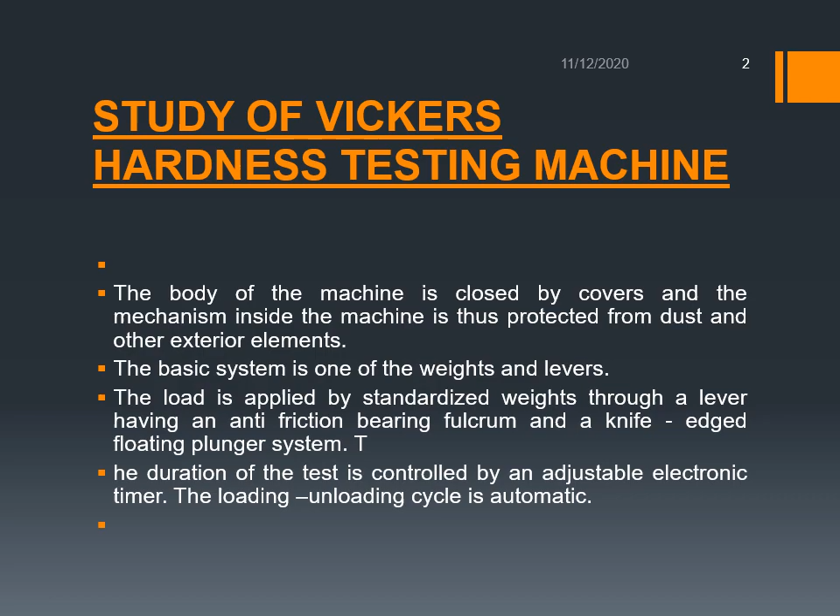And here the indenter used is made of diamond, having a regular pyramid shape with a square base, also known as a square right pyramid.

Now the produced impression is projected to the focusing front screen, while the diagonals of impressions are measured by means of measuring equipment. So here you will be measuring the diagonals of the square shaped indentation. Usually the test loads are 50, 30, 20, 10 or 5 kgf. You can use any of these depending upon the specimen that you are using.

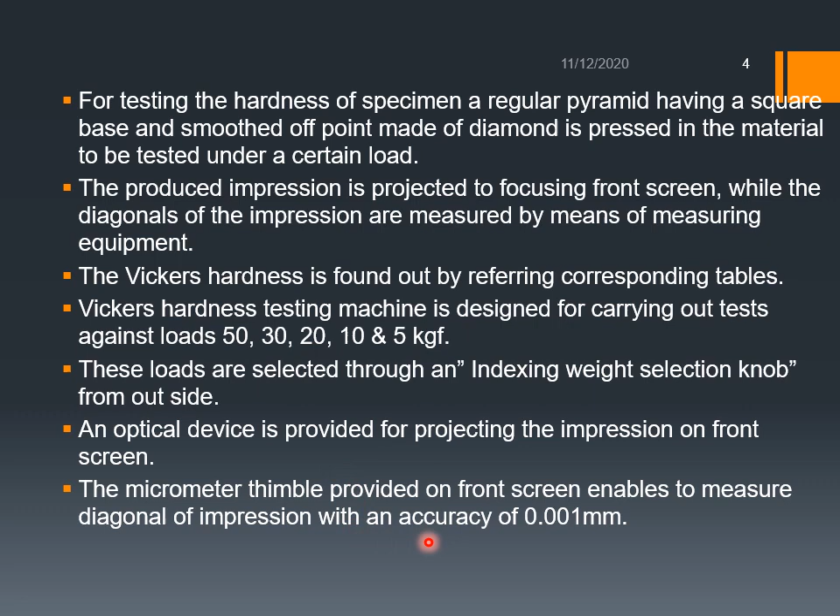The loads are selected through an indexing weight selection knob from the outside, similar to the previous machine used in Brinell or Rockwell test. And here an optical device is provided for projecting the impression in front of the screen, from which you can directly measure the length of the diagonals of the indentation with an accuracy of 0.001 mm.

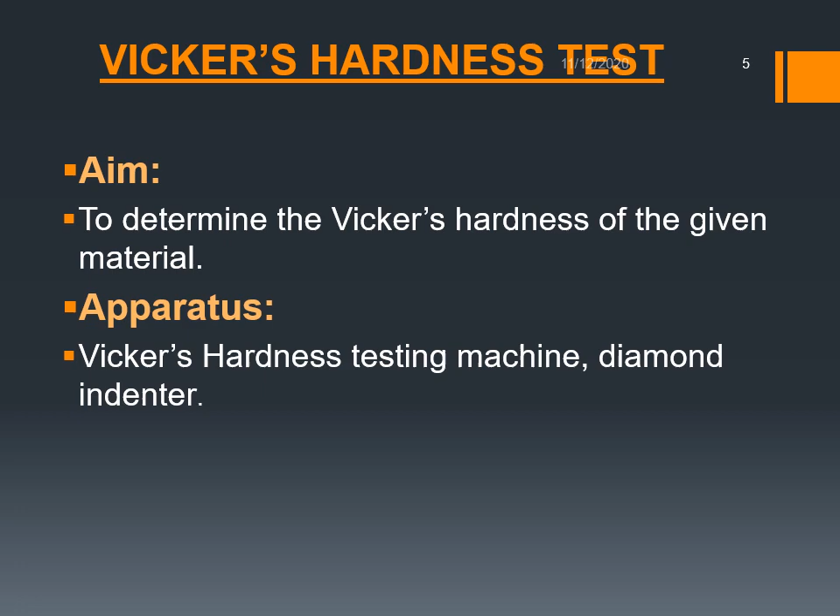Now let us move on to the test. The aim of this test is to find out the Vickers hardness of the given material. The apparatus is a Vickers hardness machine and a diamond indenter of square right pyramid shape with a square cross section.

Now theory: hardness is the resistance offered by the material against penetration under a localized pressure, or a resistance to abrasion. You have already learned this definition in the previous experiments for Brinell and Rockwell test.

The Vickers test consists of indenting the test material under a load P with the diamond indenter in the form of a right pyramid with a square base and an angle of 136 degrees between the opposite faces. The two diagonals D1 and D2 of the indentation left on the surface of the specimen after the removal of the load are measured using the microscope.

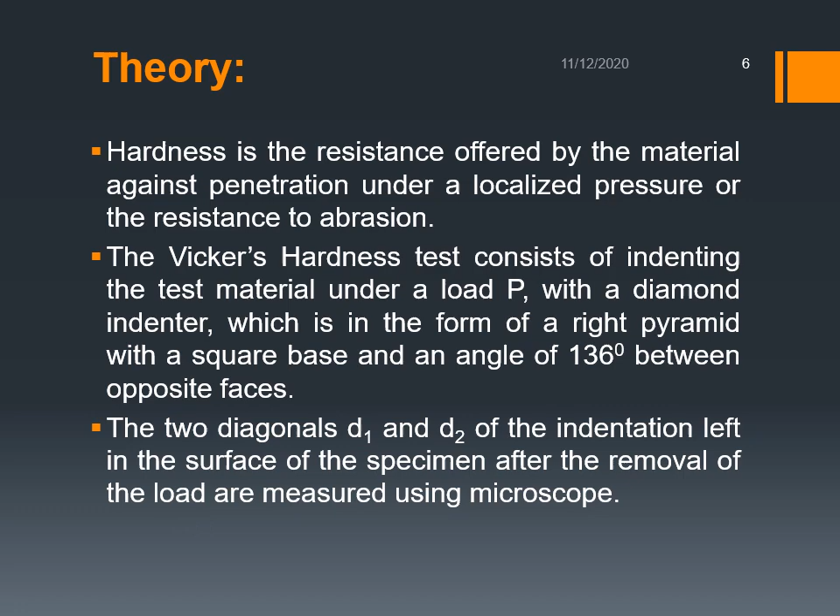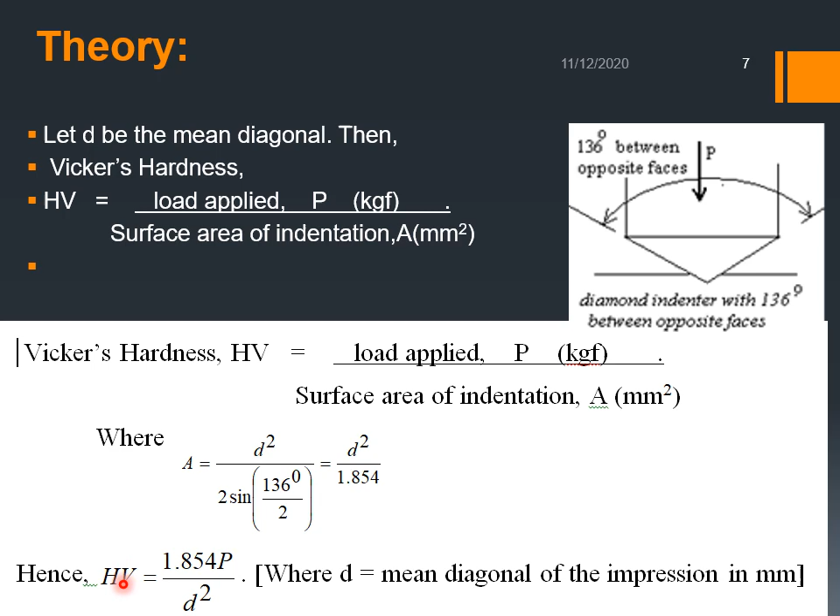The surface area of the indentation you can find out using the equation A = D² / (2 sin(136°/2)), that is equal to D² / 1.854, where D is the mean diagonal of the impression in mm. Finally, the Vickers hardness number HV is equal to 1.854 P / D².

Now the procedure: select the weights in accordance with the expected hardness of the specimen to be tested by turning the weight selection knob. That is, the test load will depend upon the specimen to be tested and its approximate or expected hardness. Now place a well polished specimen on the testing table under the optical telescope and rotate the hand wheel so that the specimen gets focused sharply on the front screen.

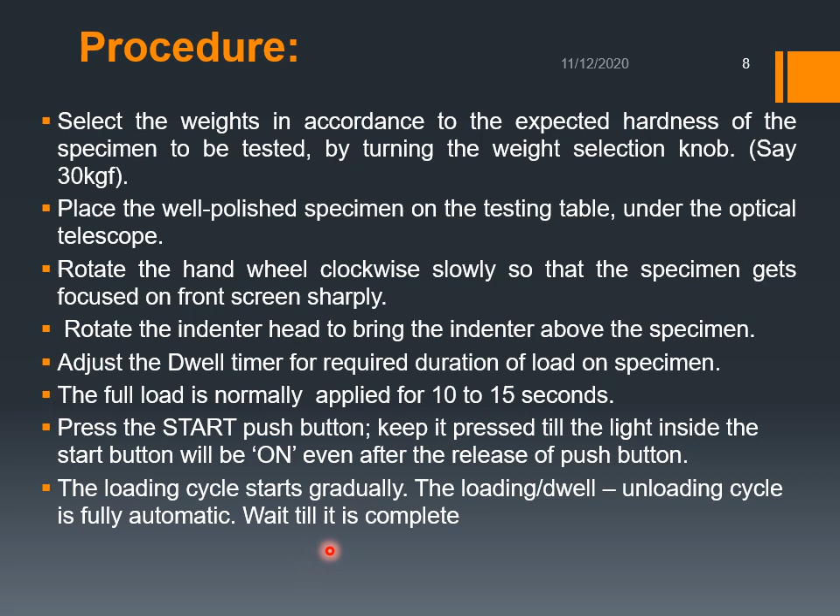Now rotate the indenter head to bring the indenter above the specimen and adjust the Dwell timer for the required duration of load on the specimen; normally the duration is 10 to 15 seconds. Now start the experiment by pressing the push button and keep it pressed until the light inside the start button is on, even after the release of the push button. The loading cycle starts gradually. The loading or dwell, here the loading and unloading is fully automatic, and wait till it is complete. You have to simply press the switch and wait till it's complete.

Now index the indenter head to the next position so that the objective of the optical or microscope system will be exactly over the indentation. Now measure the diagonals of the impression on both axes and let them be d1 and d2. That is, you have to measure both the diagonals; usually one will be aligned along the vertical axis and the other along the horizontal axis. So you can simply measure these diagonals and calculate the mean diagonal d.

Now substitute the value of d in the Vickers hardness formula and find out the Vickers hardness value. Also, you have to find out the Vickers hardness value from the chart or table corresponding to the d value. Now, the Vickers hardness should be reported in this form, that is 800 HV/10, which means a Vickers hardness of 800 was obtained using a 10 kilogram force test load.

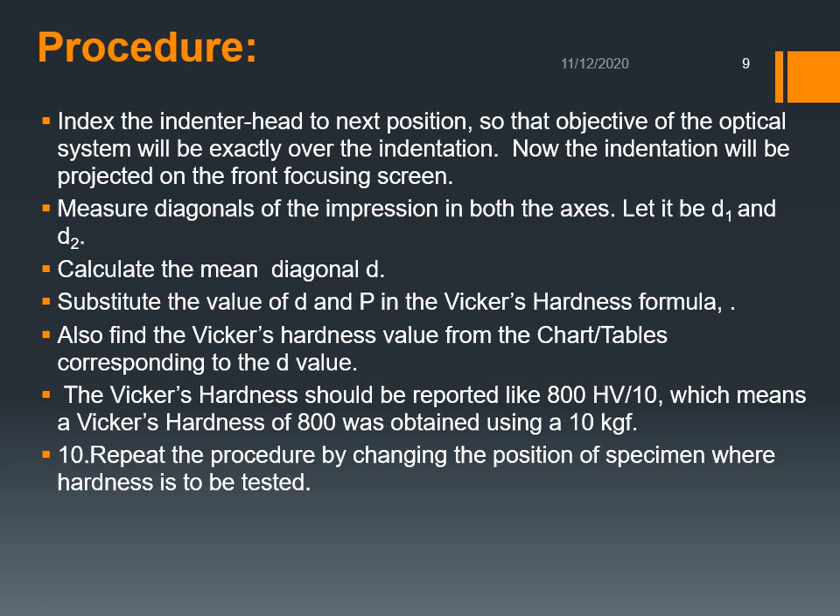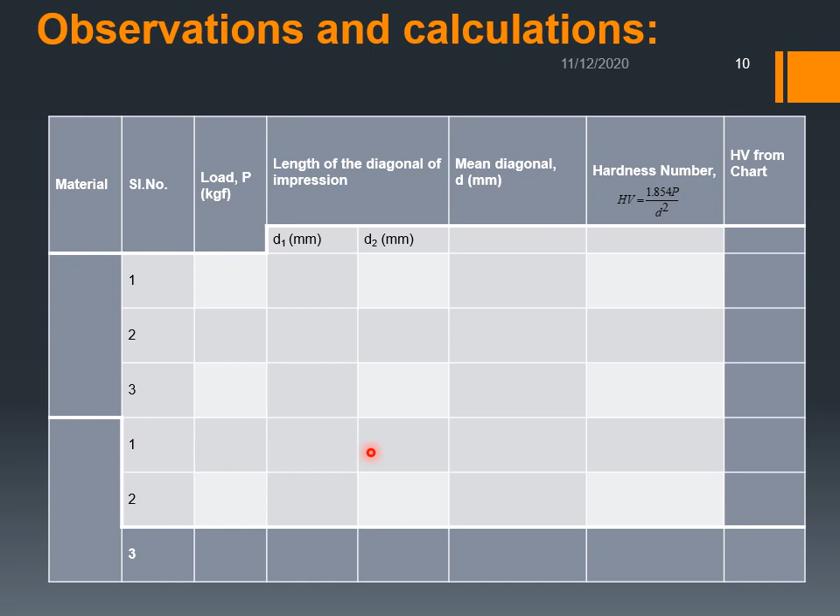Now D1, D2, D1, D2, D1, D2. That is, 3 times you have to take the measurements. Now take the mean diagonal value and then the hardness number. Simply calculate it by substituting the values here. And also corresponding to this mean diagonal, you have to take the hardness number from the chart. If you are conducting the test on a second specimen, write similar observations here. Now you also have to show a sample calculation for any set.

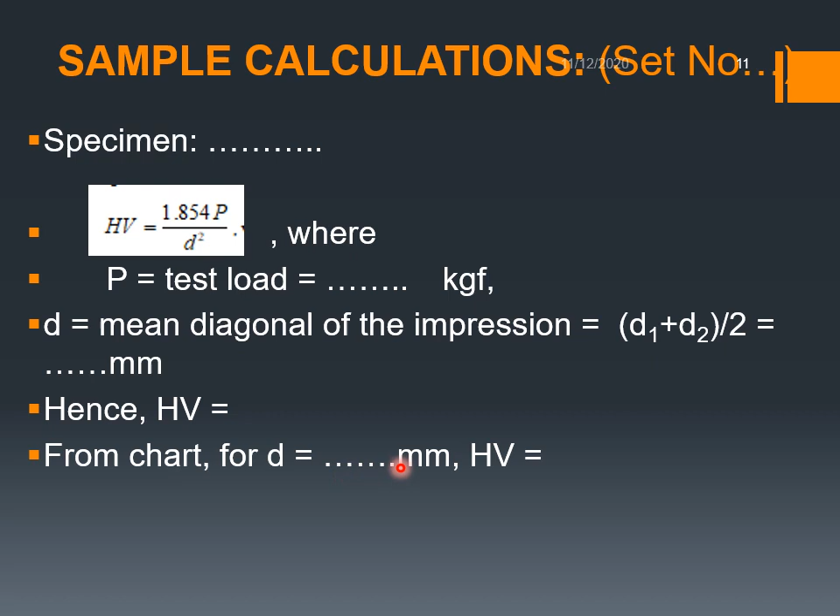Now the specimen, that is steel, we are testing here. This is the equation for hardness. P is the test load, that is 30, and d is the mean diagonal, that is d1 plus d2 by 2. Find out HV from this equation. And from the chart, for a particular mean diagonal value of dash mm, find out HV. Now the results should be expressed in the form: hardness number for specimen steel is equal to dash HV/dash, and this dash is for the time, that is 10 seconds. And from the chart, if you are doing a second specimen, similarly you have to give those values here.

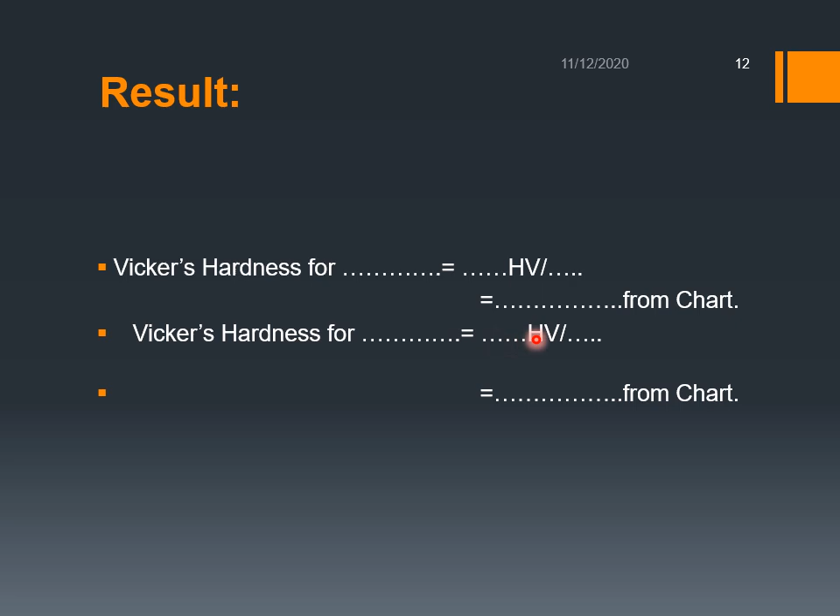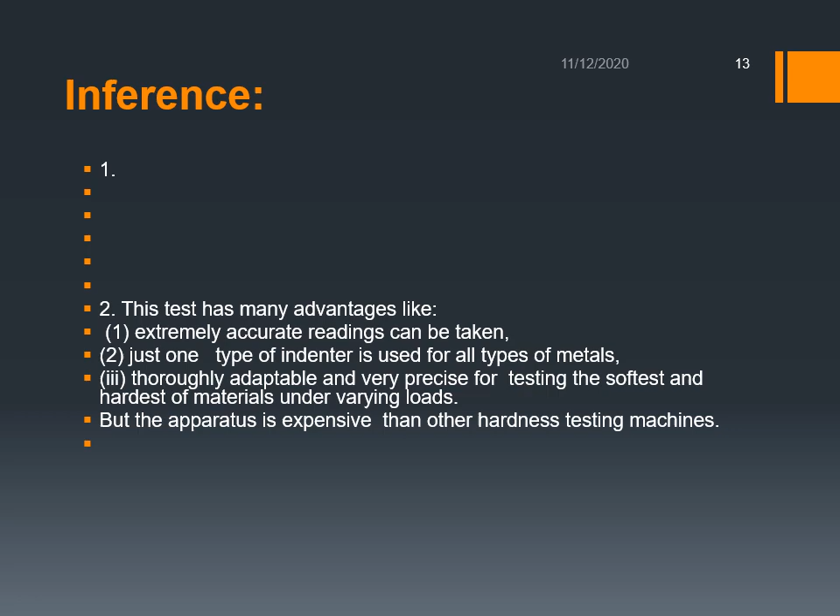Now these are the inferences; the second inference is given for you. You have to find out the first inference from the corresponding codes for hardness testing. The corresponding IS codes may be available for the Brinell, Rockwell, or Vickers hardness test. You have to search for those and find out an inference from those IS codes.